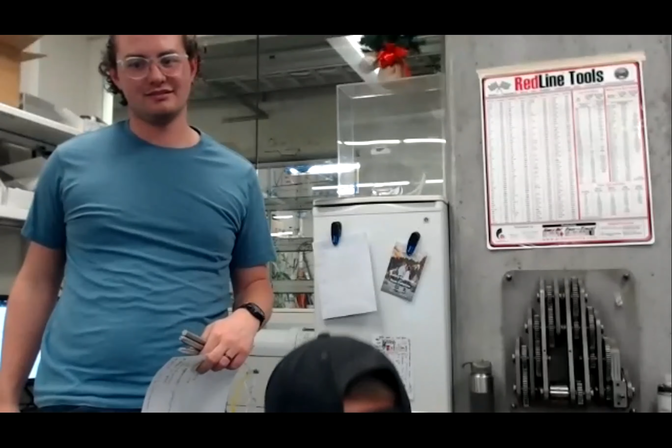Apparently I'm not using my audio. Look at that. Is our microphone working? Can you hear us? Can you hear me? Tyler! Sorry, I can hear you guys, but my headphones aren't working for some reason. I'll be right back. So his headphones haven't connected to his computer, but he could hear you coming out of the computer probably. It's a good solution. Okay, there we go. That was great.

Wow, Lizzie, your fan is amazing. I hope you're okay. Lizzie, we can't hear you. Oh, well. Okay, cool. I was muted. I didn't know. That's okay. You are good. Look, with the background recognition thing, it slowly chops away part of my face. Anyway, cool. Well, let's get going.

All right, let's get started, guys. How many of you did the practice assignment from last time? Good job, Ashley. Do you have any questions? Was there anything confusing or that you couldn't do? I have one question. So with boring, with circular and the other one, which one is faster? Because I noticed with circular, every time it does it, it comes back up. Does that time add up?

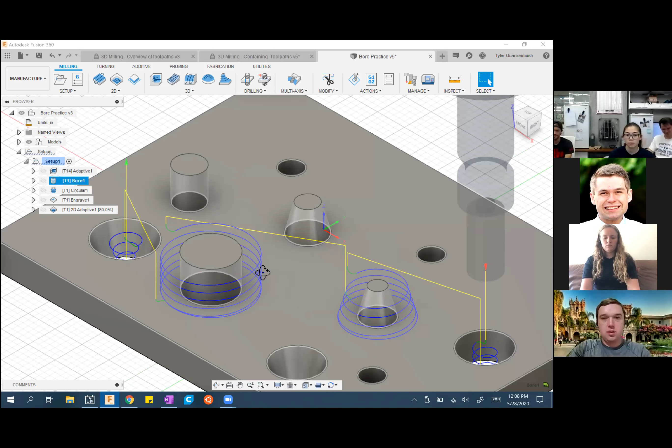Let me share with you. Okay, so you were noticing that bores and circulars, what you're noticing is something going on with the linking parameters. In a bore, the yellow line travels in and then it just goes down. Whereas in a circular, you can see it better on one of these tapered guys, it retracts every single time. That's something you can control in your linking parameters.

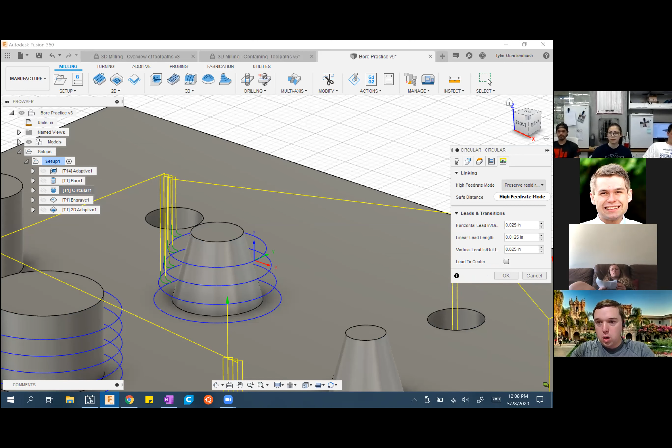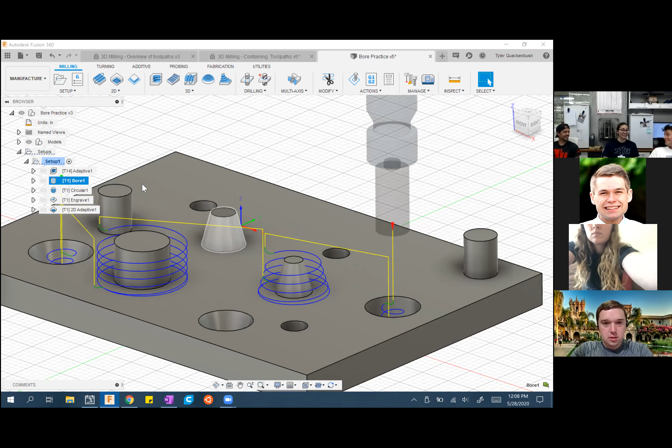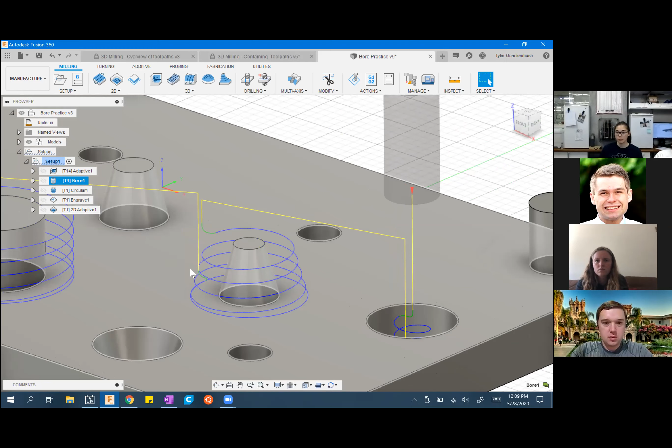Whoa, you can't control that in a circular. I'm wrong. I have no idea why you would want to do that. Actually, I have a thought. Does anyone else have thoughts on why you would want a toolpath that retracts and leads in and leads out and does all sorts of funky stuff like this versus a bore which just goes down and in? Thoughts, feelings, concerns?

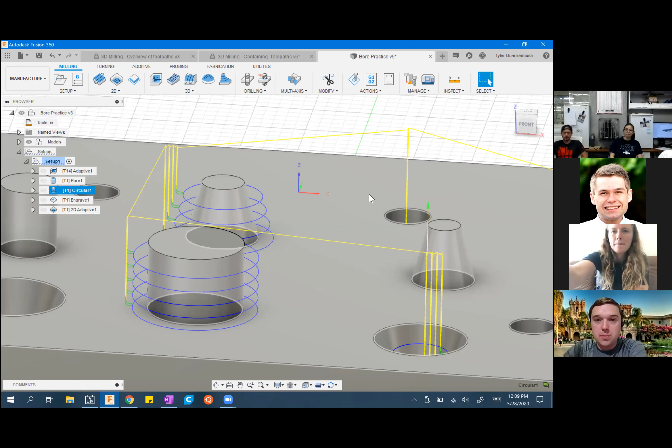I had one thought and now I'm realizing it's invalid. Imagine we hadn't cleared away any of the stock here, so it's still this chunk of stock, and we're just going to do this circular. We would be going in and out here, but those are rapid moves, so that would still crash the machine. Honestly, I have no idea when you'd ever want to use a circular. In answer to your question, Ashley, the bore is probably always going to be faster.

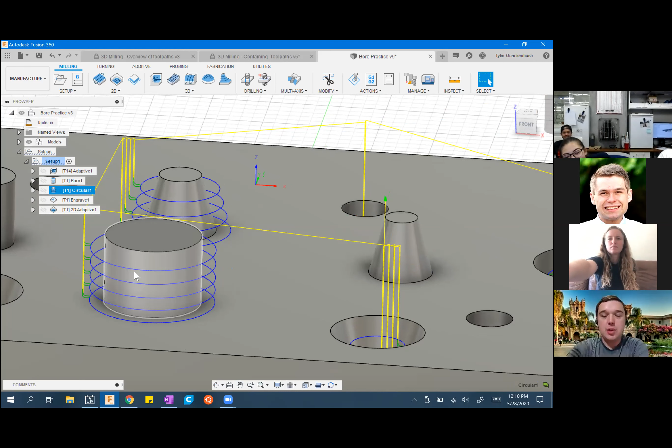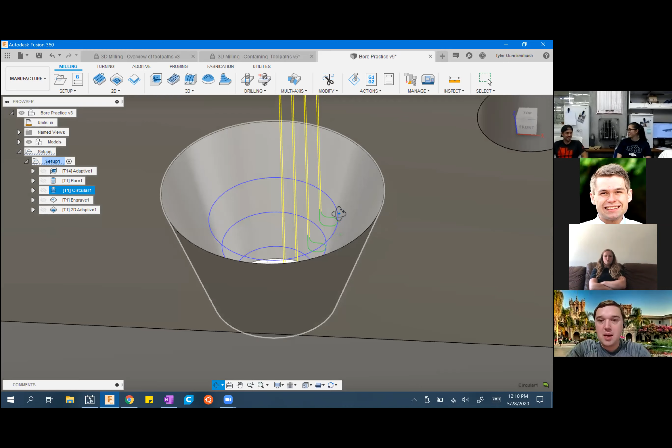Does it help with chip evacuation at all, or does boring take care of that? Oh wow, Ashley, good job. That is probably a situation where it would matter. Say you're going down into this hole. That would give the coolant time to evacuate chips, and give you time to come back in and get things done. In metal it probably wouldn't matter a ton, but in wood chip evacuation becomes a huge deal, especially on routers. Thanks, Ashley.

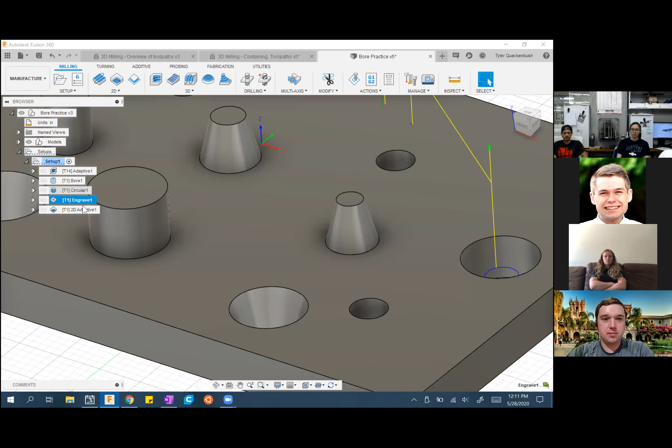Anyone else have thoughts about those two toolpaths or questions about the exercises? Okay, sweet. I'm going to point out again one of the big things you would have done in this 2D adaptive review, finding out why that toolpath looks so funky. I'm going to simulate this, and find where everything goes to pot, where we're violating an assumption. Actually, I'll just zoom through and find it, because asking you to tell me things through Zoom doesn't work.

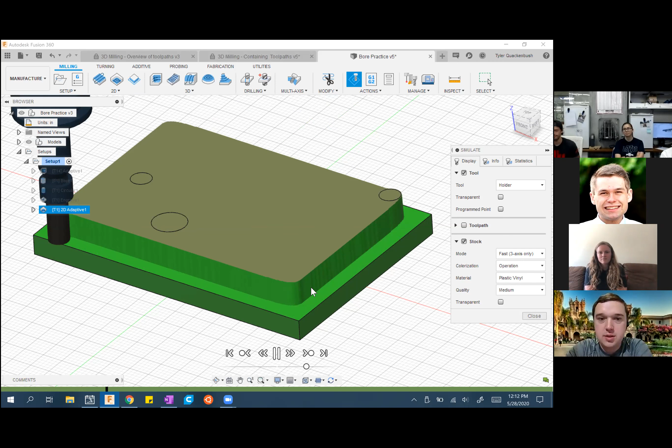Okay, so I think on this next pass it'll do it. So you see how it's taking off its constant step over? But once it reaches one of the holes that was left as kind of void from one of our... Are you guys seeing this run fairly smoothly? Is it super jerky? It's jerky. It's jerky, okay. Well, I will stop it and slow it down when it gets to the interesting part.

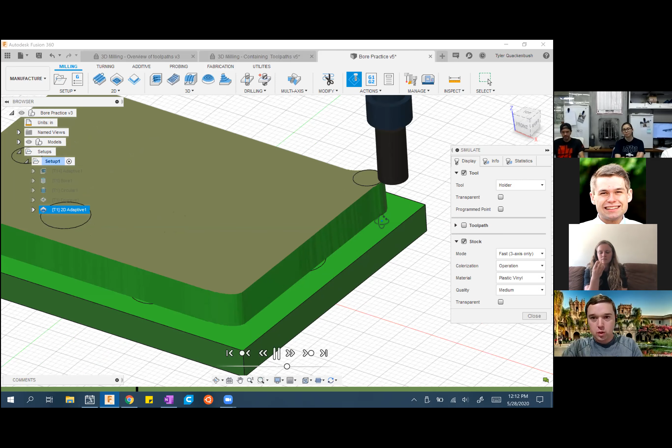Okay, here we go. Okay, we're gonna watch this in excruciating detail. No, don't go, okay, good. So, we're gonna watch from above. All right, so you're gonna see it come in and it's taking off its traditional chunk. But you see as soon as it gets into there, look how deep it's burying itself in the stock. It thinks it's moving through air, but in actuality right here, it's slotting.

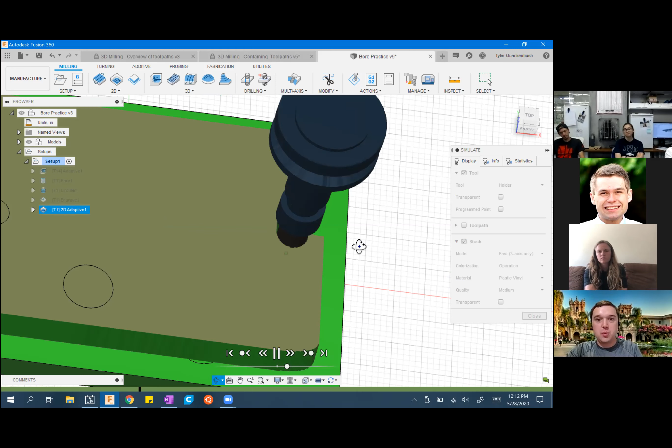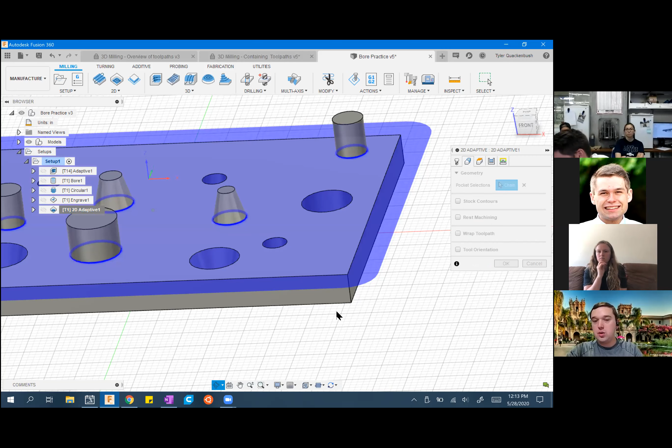That's full 100% engagement right there, which is totally going to wreck our tool, because our selection told it that it had no stock relative to it. Once again, if we come into here, we can see our selection, and I just selected this face. You'll notice the blue that it shows you doesn't actually tell you that you're gonna shoot yourself in the face on that. You probably wouldn't even notice until you got on the machine and broke a tool. So that is something to be very careful of with Fusion's selection system.

Okay, Ashley, any other questions about bores, helixes, and stuff? Okay, cool. Well, guys, I am happy to blabber at you guys, but to be honest, I don't know how much people are going to get out of this class from just my blabbering. Yeah. I really want to encourage you guys to go and actually do these practice assignments, which once again, you can stay clocked in for. There's not a ton going on in the lab right now, and for those of you who are at home, this is something definitely good that you can do.

Let me see if I can do something real quick. No, looks like I can't. Okay.

So what do you guys want to do about that? Let's just have a little chat real quick, because I am not getting much feedback here, and I don't really know how well this class is going. But you guys do. So let's get some feedback. What are you guys thinking about how this class is going? Are things useful? Is me blabbering enough for you guys to learn? Do we need to take a break for a week and give you guys time to actually do practice assignments? What do you guys think?

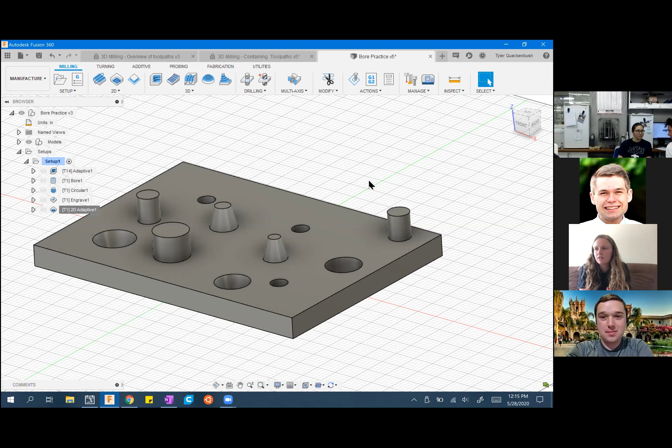Any other thoughts? Are we moving too fast, too slow? Should I be giving you smaller assignments in little chunks, smaller practices, so they're not so big and daunting? I have something. Yeah, go for it. So I think it'd be really cool to have a cool model, and then have a full class and just do all the camming for just one thing, and go all the way through. For me, that'd be really cool.

Okay, that's really cool. If that's useful, so today we were planning on covering 3D adaptive clearing. I could just work that into a model that I already have whipped up, and we could run through something like that today, if that would be helpful for you guys.

Cool. Thanks, Cam, not Cal. If any of you have read any Brandon Sanderson books, I'm rereading the Stormlight Archive, and one of the main characters' names is Cal, so sorry, Cam. I've read it too. Yeah, Lizzie, go ahead.

For me, I don't have a lot of computer access because Brad and I are sharing a computer, so I'm kind of slow. Also, learning Fusion, I'm just trying to get my head wrapped around it because it's just different than SolidWorks. I don't even feel like I have a good Fusion background, let alone a good camming background, if that makes sense. So I feel just behind. Okay. So addressing that one, Lizzie, would it be helpful if we took kind of a hiccup week where anyone who feels like they're behind could come and we could start over with basic stuff or run through.

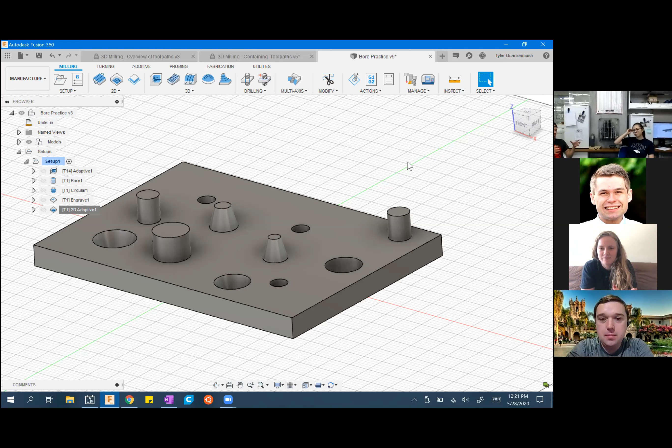On another note, let me pull up our calendar real quick. Go, kids, go away, I don't know how to make this thing leave.

Hide. Dang it, I can't get my tabs. Okay, well, we'll just mute it, and I'll just slam it back.

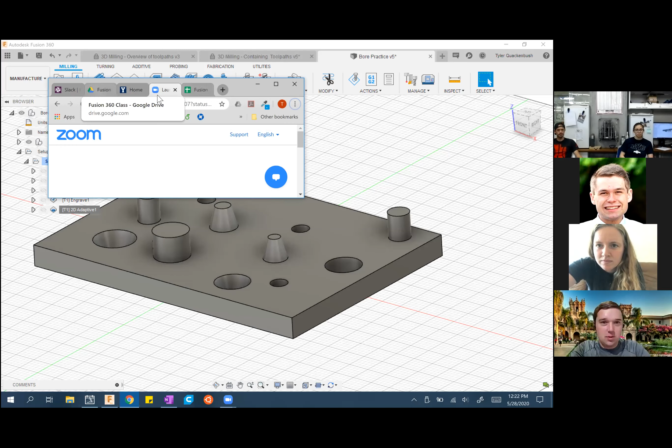Okay, so currently the last 3 that we've got, today we're going to talk about 3D adaptives and rest machining. I also realized I never put drilling in here. So, drilling.

We only have this week and 2 more weeks on schedule, so we have other potential topics here. I'm going to open up a poll to you guys, and I guess you prototyping lab people, I'll weight your responses a little bit more. Here are the potential topics we had. If you guys could pick your top 3 choices from that list, then we can talk about it once we have polling results, and how the class goes from here, because we're kind of reaching the end of my knowledge. Even once we start getting into 3D adaptives and surfacing, I'm not a pro. So we can have a little chat about how we want stuff to continue.

Okay, Benjamin seems MIA, so I'll take your two. So far I've got more feeds and speeds stuff, parametric modeling, toolpath patterns, 3D printing in Fusion, and tapping from you guys so far.

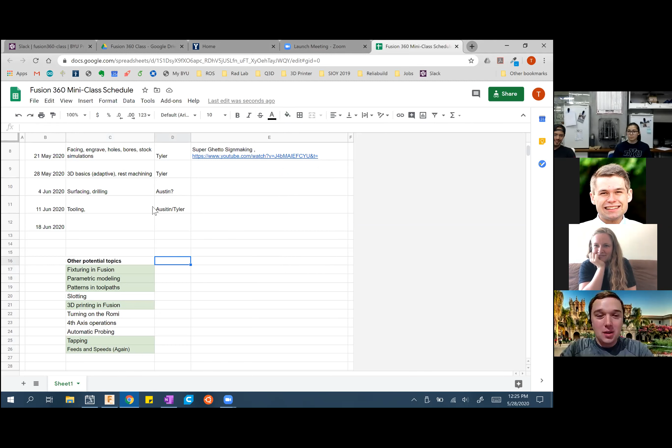Machine maintenance, machine maintenance, I just got a suggestion. But no, seriously, yeah, that one's a little hard to do over a Zoom meeting, but I might be able to stop into the prototyping lab and chat with you guys sometime. It's just the day-to-day things like oiling the rods and cleaning the CNC routers. Oh, totally, good point, Jennifer, thanks.

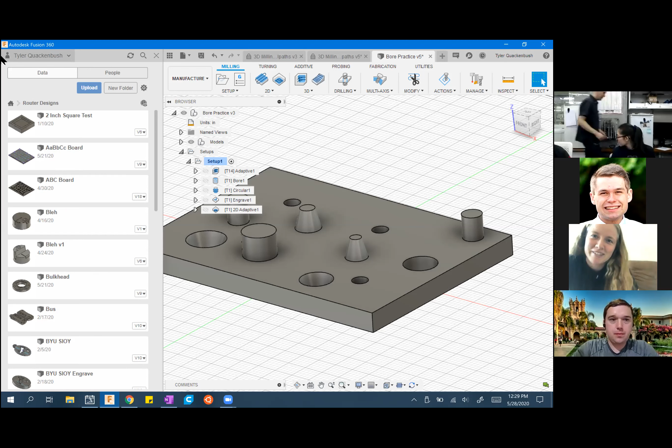Yeah, or just along those lines, where do we feel like our holes are in our learning? Just like refreshers, so we feel like it's okay to have holes of things you don't know, so there's a safe space to express that, because I'm a millennial. Okay, that sounds good to me.

Okay guys, without further ado, let's get on with this. Let's cam something. Okay, so I am opening up, this is my CNC router.

This dang top bar will not go away, and it bugs me. I'm gonna stop sharing for a minute and try resharing to see if it goes away. Dang it. Oh yay, now it went away.

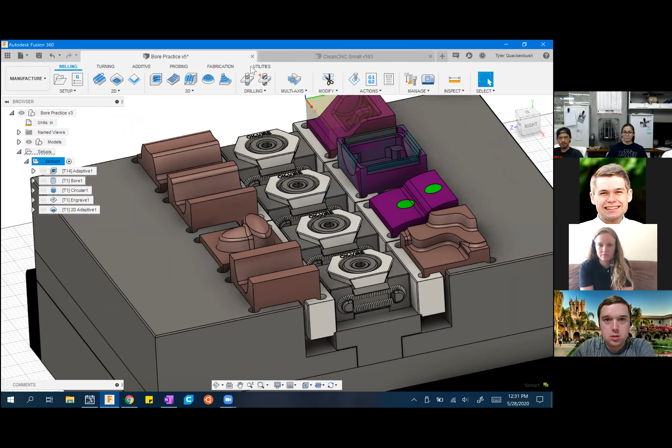Right now I'm opening up, oh geez, my computer's totally gonna crash, isn't it? So this is actually where I modeled my entire CNC router. I'm gonna kill these other ones. Yep, there's my entire CNC router, a translucent block. All right.

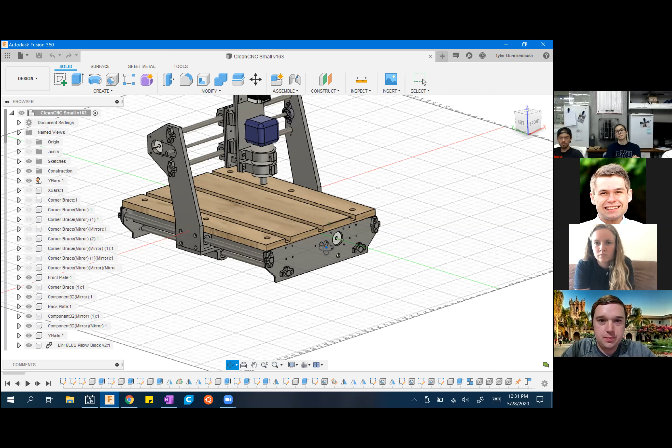So I'm gonna come in here, we're gonna cam something on this, start to finish. Let's see, what do we want to cam? One problem with this is it doesn't really show off 3D stuff, because I designed everything to not be 3D, since 3D is atrocious whenever you're trying to make anything. All right, let's cam this thing. I can't remember what it's called, we're gonna find it.

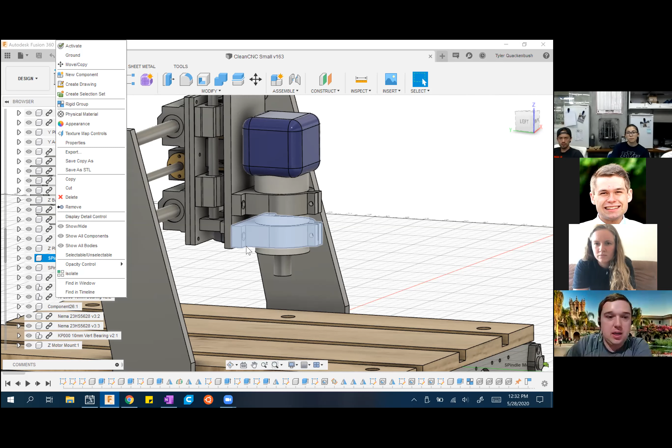Okay, this is gonna have multiple operations in it. So this is the spindle mount. In a multi-part assembly in Fusion, one nice thing is you can isolate that part and cam it in context. You'll notice when I go into my manufacturing workspace, there will be cam files for most everything in here. The way you do that is right-click and hit isolate, so that shows just this component. If I want to get out of it, I can recheck everything, or right-click and hit unisolate, and everything pops back into existence.

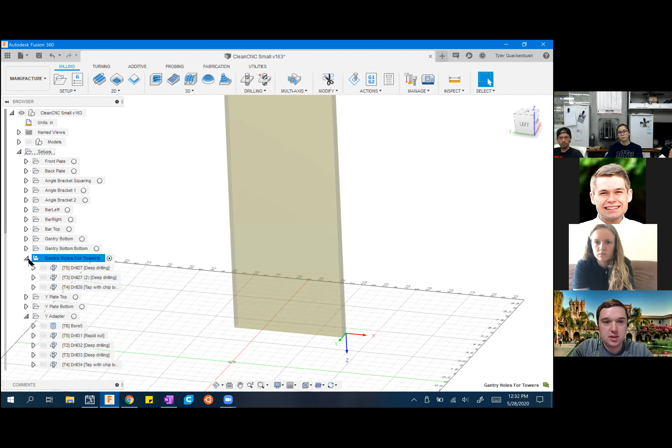I'm going to isolate it and then head over to my manufacturer workspace. You'll see in here, this is where everything and its dog lives - so many living dogs - but this is where I've cammed so many different parts.

So what we're gonna do is make a new setup. This is where stock considerations have to come in - I have to figure out how I'm gonna clamp the thing and where I'm gonna machine it from. So imagine I've got a piece of bar stock that looks like this, and I'm clamping it over here. That's how I'm going to imagine machining this thing, with it hanging over the edge. That's a bad idea, there's probably a better way to machine this, but we're going to do that for now. I'm going to hide you guys so I can't see your faces.

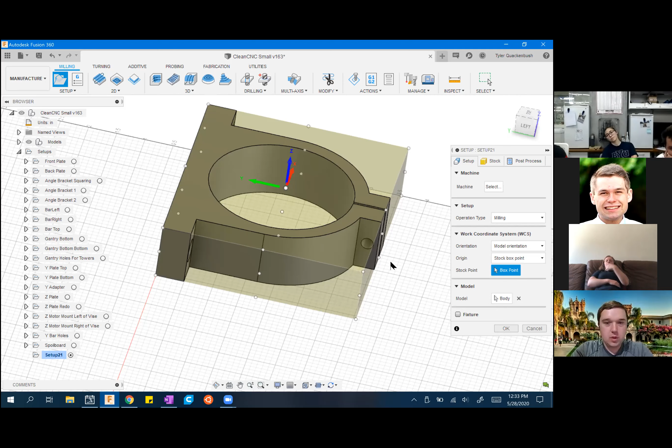Okay, so my general thought is, I need to adjust my stock. So I've got a little bit of a conundrum - I want to add some stock on the left so I know where I'm grabbing and can simulate that. But if I change my stock side offset, everything gets bigger, which is frustrating. Oh, what I should have done - all right, here we go.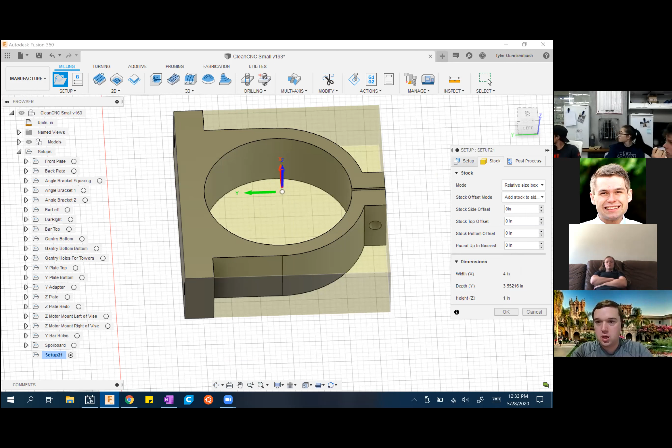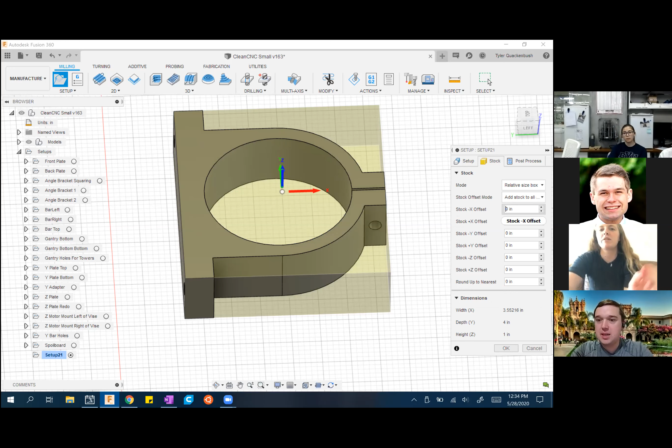I'm going to select my Z-axis and then my X-axis, and now I've got my stock oriented the right way. That's always important to do before you adjust your stock size. So that frustrating thing happened, but I can add stock to all sides, and then in my negative X, add in like 3 inches of stock. Then I've got the size of the bar I'd probably actually end up working with. I can see my depth is 4 inches, which is probably the 4 inch by 1 inch plate stock that I ended up finding.

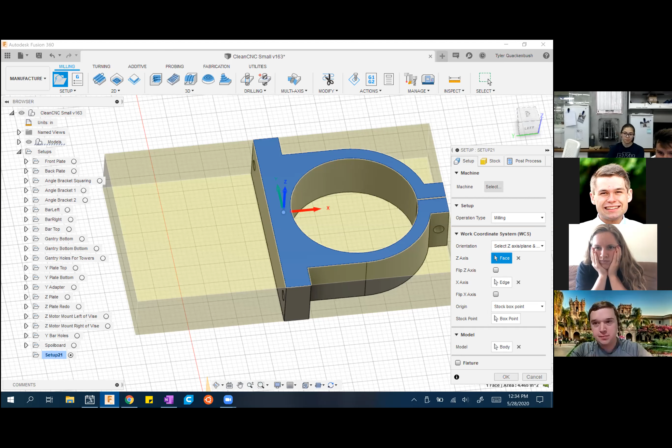So that looks good to me. We're gonna click on that and move on. Okay, what I do from here is I would probably use entirely 2D adaptive clearing toolpaths.

So I'd come in, since there's a lot of room to stick out I'd probably end up doing this on the VF4. So I'm gonna come into my VF4 standard library, and I'm gonna show you guys roughing this out with the 1/2 inch bullnose. There we go. So you'll notice in the tool library in Fusion, it lists aluminum and steel next to things.

That basically just means 3 flute versus 4 flute. So we're doing this out of aluminum, I'm gonna come in with my bullnose. Then I'm gonna look over my feeds and speeds, knowing what I want to do. Normally I would punch in feeds and speeds and then select everything, but in this case I'm just gonna select everything and then punch in feeds and speeds so you guys can see exactly what I'm doing.

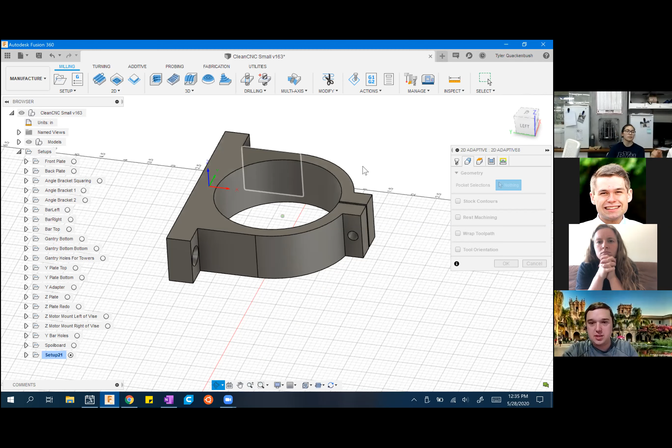So pocket selections, I want to rough out this outside as well as this inside, which I can do in the same operation. I probably want to do the outside first, so that the bulk of this remains strong. Imagine if I were to cut out the middle first and then start milling the outsides, it can jiggle a lot more than if I mill the outside first and then the inside, if that makes sense.

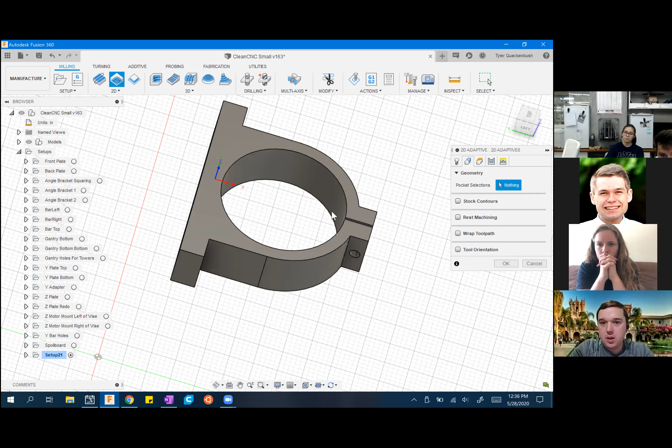Okay, my stock contours on here are not the ones I want, so that's the total stock, just so I could simulate it. I'm gonna come in and change my stock contours. Oh no. Okay, what I would want to do is select some stock contours that are just a rectangle around this, but I can't do that.

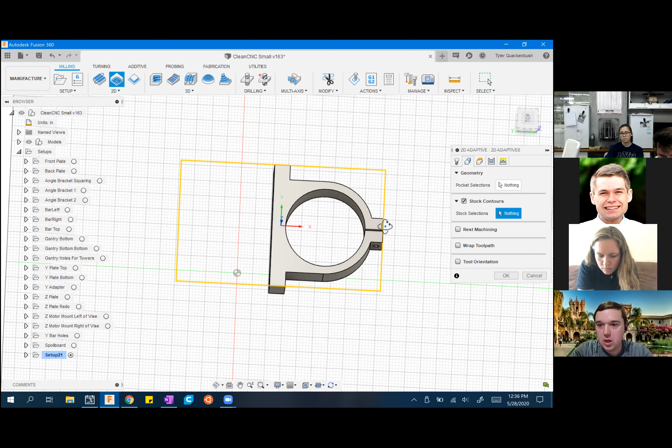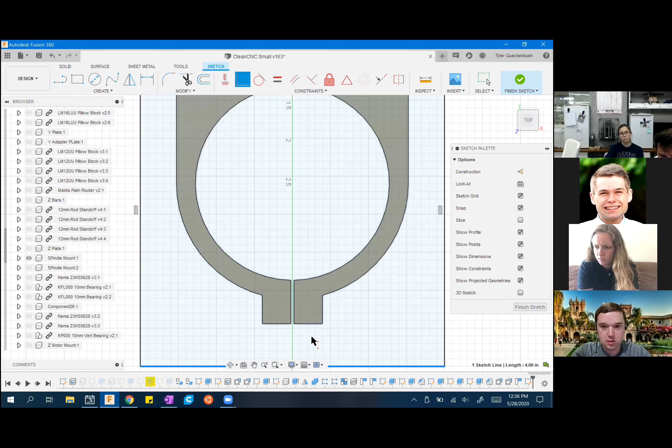So what I'm gonna do is go back into my design workspace. I'm gonna make a new sketch, and model in, just in a sketch, what I want my stock contours to be. So I'm gonna constrain that point and that point to be coincident. I constrain that line and... get at me, hey. Oh okay, I'm gonna constrain 2 lines to be collinear.

So this line and this line are now collinear. You see my sketch is all black, that means everything's fully constrained. And then I pop back into my manufacture workspace.

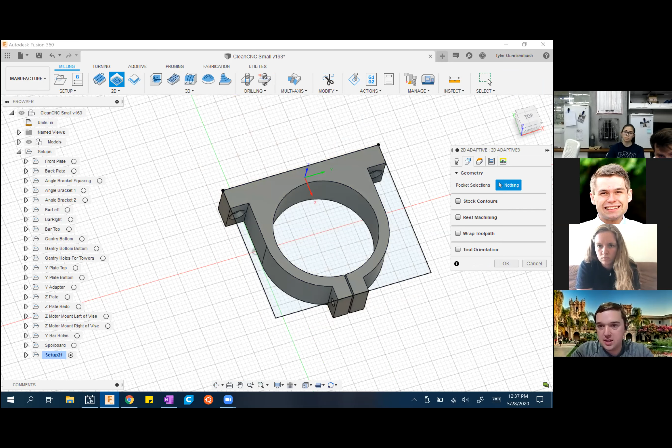I still have this random setup 21 activated, so I can come into my 2D adaptive clearing and select my stock contours as this. Now that 2D projection tells, this is the stock I want you to care about as I'm simulating, as I'm calculating stuff. So then my geometry, I want to select this bottom edge, but not all the way around.

So I'm gonna select there. I don't want it all the way around, so I'm gonna click it again and say open contour. Then I can come in and select this edge. That's not where I want it to be though, so I'm gonna come in and select, oh, poopeth.

I didn't think about that. So because I have this little gap in here, this entire bottom edge is gonna get selected when I do my open contour. Let's look and see what happens as that goes on. It may or may not end up working out.

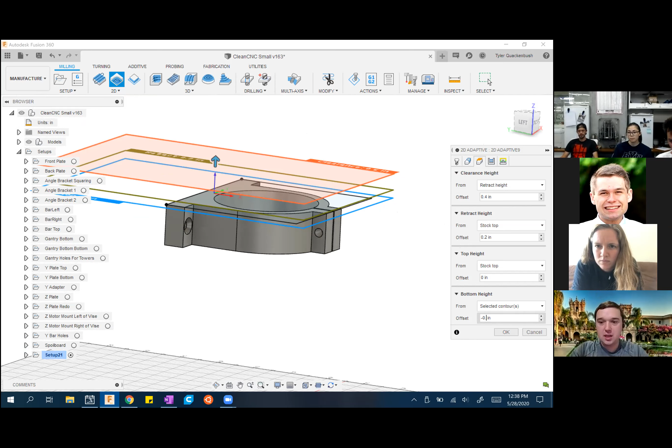Okay, so I'm gonna select my heights. I'm gonna trust my clearance and stuff planes because I've already got them set up where I want them to be. I know I'm not gonna have any bolt down sets or anything, so I'm comfortable with a clearance height that's 0.6 inches above my part. My bottom height, selected contours would make the bullnose touch right there, but I don't wanna do that. I want my bullnose to go all the way down, so I'm gonna make sure my offset is more than the radius on that bullnose cutter. And when we simulate, you'll see what happens.

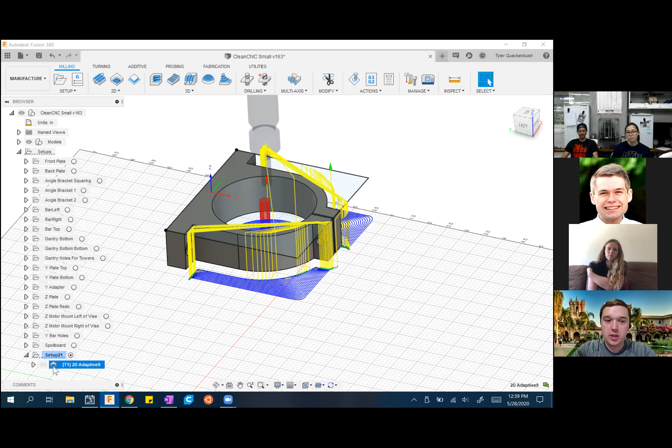Okay sweet, that's not exactly what I wanted to do. So often I come in and right click and hit edit. That's not the only way you can edit. If I try double clicking on this, it lets me edit the name, which is dumb. But if you double click the icon, it brings up the edit window. So quick tip for those.

And it's using a 1/4 inch flat, which is dumb. That's why it was doing weird things. VF4, 1/2 inch bullnose. Okay, let's try that again.

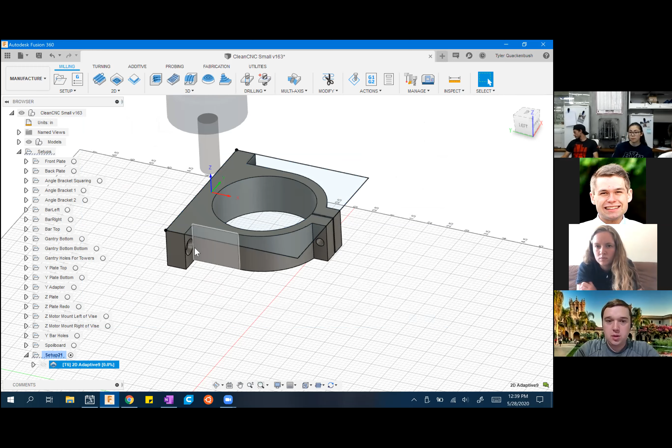Okay, so now you see what I'm trying to do. I'm gonna try to mill all the way around there, and go full depth on that. So I want to adjust my step over and stuff accordingly. It's been a while since I've done this, so my feeds and speeds might be a little bit off. Since I'm on the VF4, my maximum spindle speed is 8 grand, so I'll leave that on there.

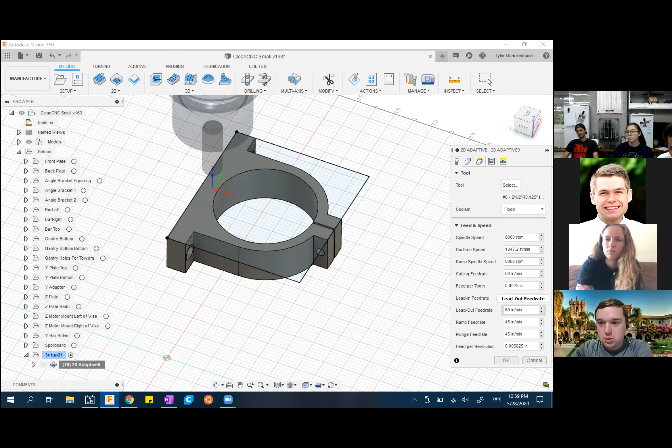Okay, feed per tooth, I'm gonna be a little bit more gentle with. Oh, that's good. I'll leave 2.5 thou per tooth. Okay, those are probably good. Now what I wanna do is, since I've edited my heights, I come into this guy and I edit my optimal load. I'm actually gonna change this down to 10%. Step over. It's in climb direction, which is great. My minimum cutting radius is 10%, which will probably be fine.

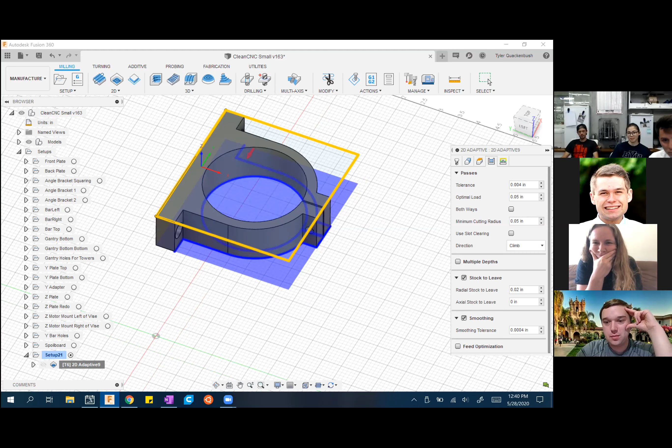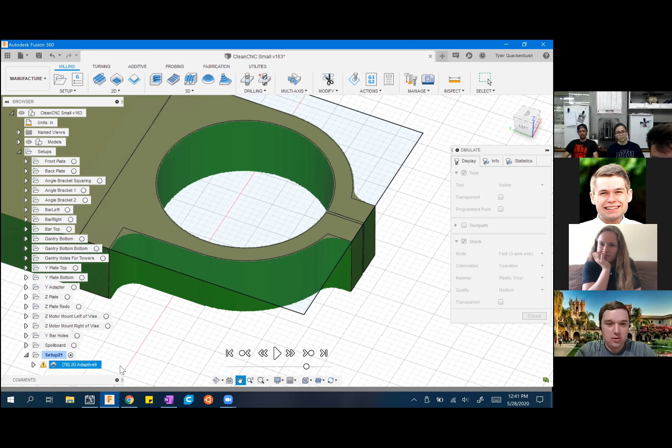Yeah, so just so you guys know, this piece that I picked right here is actually really atrocious and is not well designed for machining. Does anyone watching have ideas of why this is going to be terrible to machine? Let me simulate it and give you a little hint. You're gonna have a radius. Oh yeah, I will. Look at that. That's gross. And that's gross. I wanted that to be square, but it's not square.

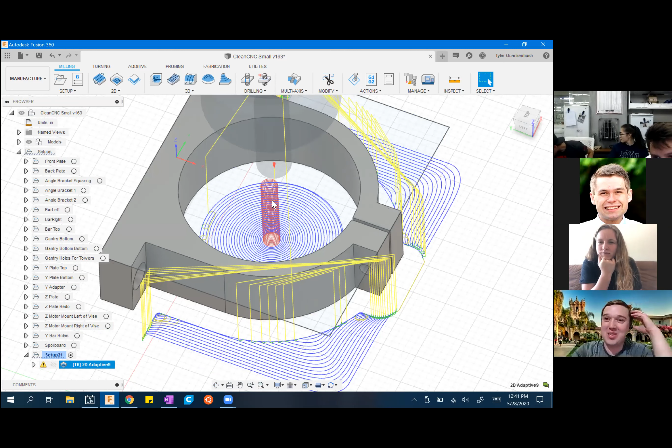This part is poorly designed and would need a lot of different setups to make it work. I'll show you how I would do it. Or how you did do it? No, I haven't machined this one yet. This one I ended up just 3D printing because I just wanted to be done with my dang router. So it's probably the least rigid part on my whole router, but that's okay. I can put up with it. Yeah, so that's a problem. And no amount of tiny tool is going to make a difference on that because it's so deep down.

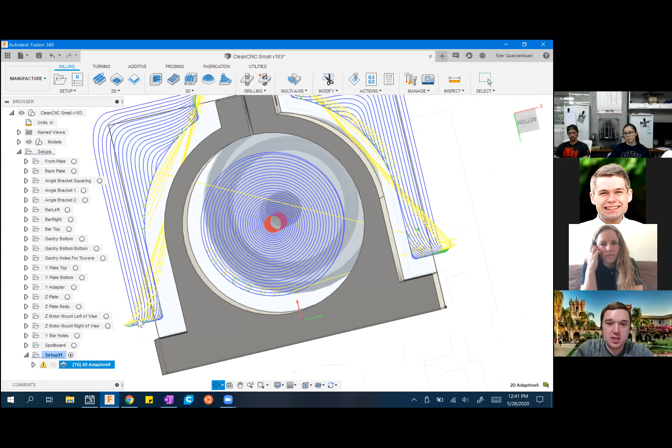What I would have to do is I'd have to flip it up into this operation and come in with some atrociously long tool to get that square edge, then hit that square edge, do it in a different operation to get that atrocious angle and put those holes in. And then afterwards, I'd probably come in on the bandsaw and just chop that with a bandsaw because I don't want to deal with it. That's what I was thinking. Yep, I need a 5-axis mill.

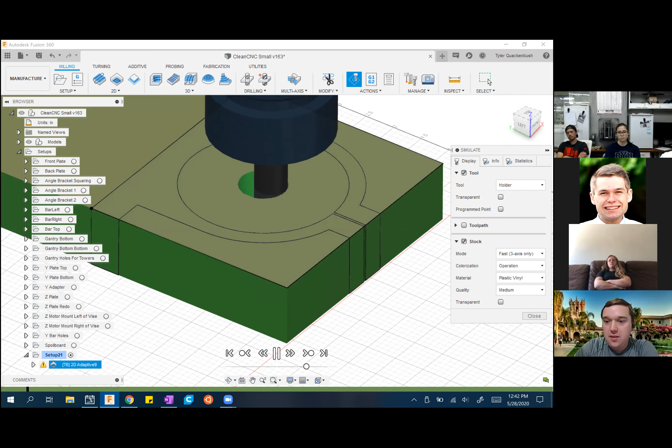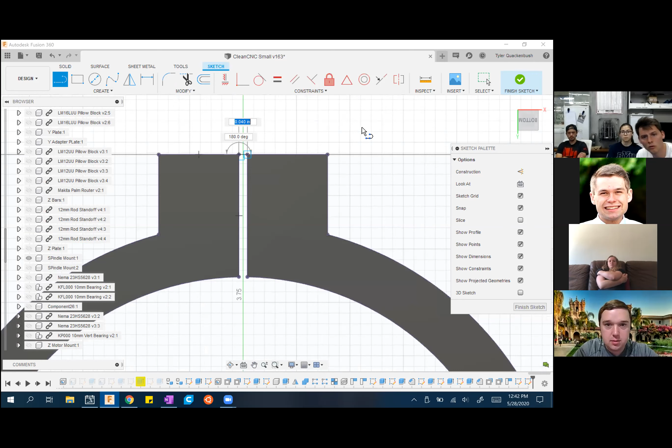So, remember how we had a little drama with my stock selection setup? You see what it's doing first is it's cutting out that middle portion, which we talked about we didn't want to do because of rigidity concerns. What I have to do now is if I want to force it to do the outside first and then the inside, I have to come back into my design workspace, make another sketch, come onto this bottom, project all this geometry, and then I'm just going to bridge this gap with a line. What that does is it gives me one continuous curve.

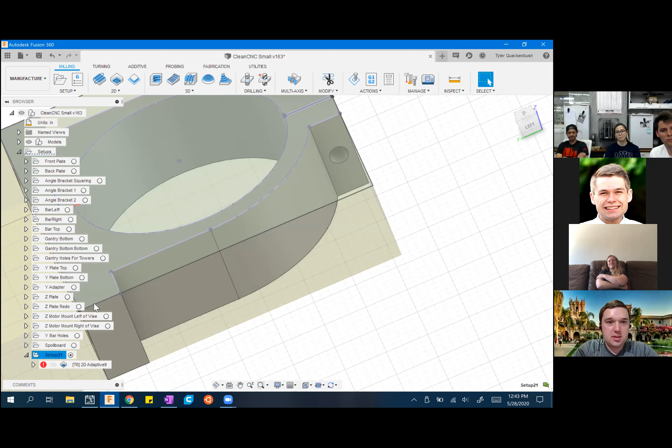Oh, what? It was on the top. Well, that's silly. Sorry, guys. Well, in a future day, I would go and change that sketch plane to be on the bottom. But instead, I'm just going to show you how I do this. Okay, so now, hide. Instead of selecting that bottom chain, I'm going to come in, I'm going to select this guy. So this is a common technique used. Oh, no, don't select the face. Oh, where is it? There.

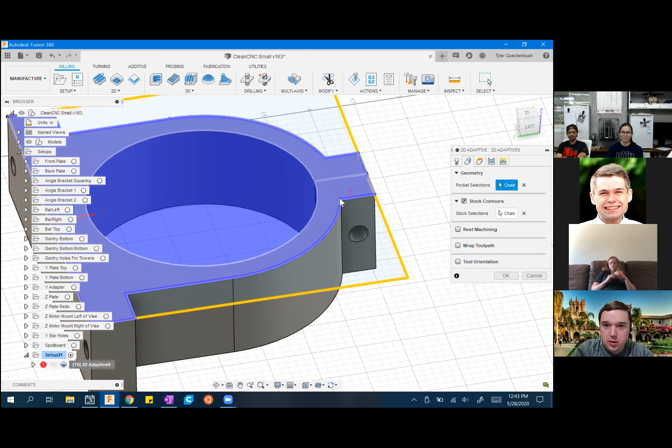So I've selected that edge, but you see the little arrow is showing the inside. I click the arrow and then it goes to the outside. But because I bridged that little gap, now it's just doing this line. What this also means is, though, since my bottom height was based on my selected contours, I'm not going to actually mill much. I'm just going to dip my toes in the stock and then move on with my life. I need to change that.

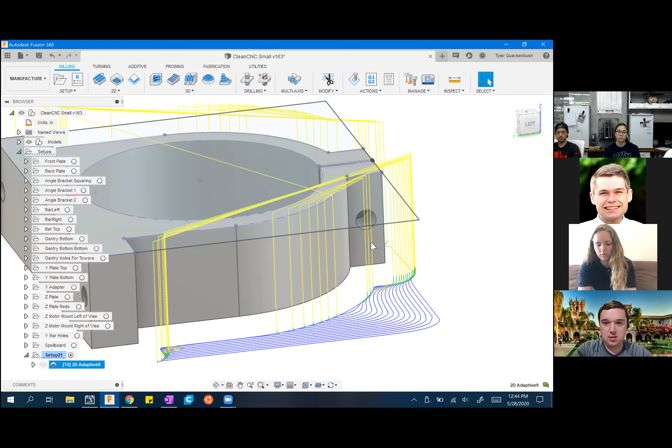So I come in, and my heights, instead of a selected contour, I'm going to go for a selection. That selection, I just select anything that's on that bottom plane. You see my bottom updates. I still have my breakthrough, and my toolpath will generate just dandy. Great. Okay, so I'm going to come in and edit that.

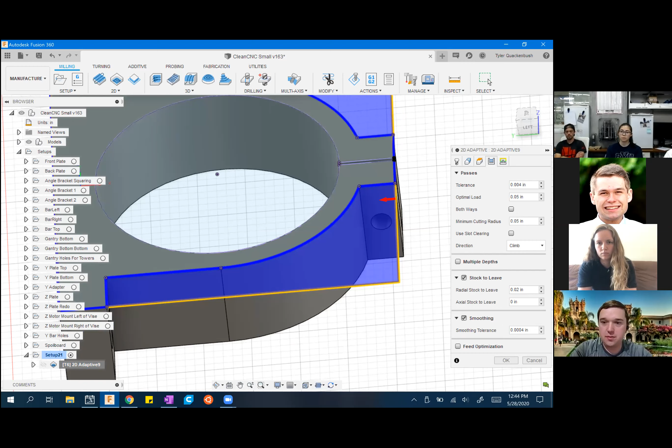You notice I've got stock left in here. I've got radial stock left on the edges. So I'm going to want to come in and clean that up with my good friend 2D contour. So I'm going to come in with the 2D contour, and fortunately we made that geometry, which is good. So I can still come in and select that geometry.

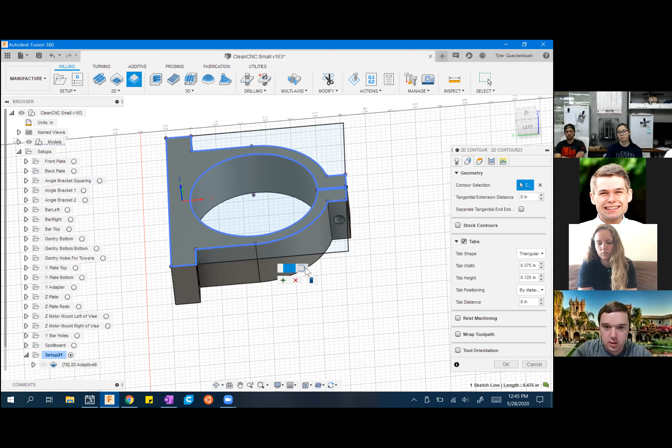And I'm going to go on open contour, and then this allows me to come in. I'm going to select to that point. Then I'm going to select this guy. So because I selected my, oh, you stinker. It selected that entire outer thing. Okay, well then I'm going to cancel that.

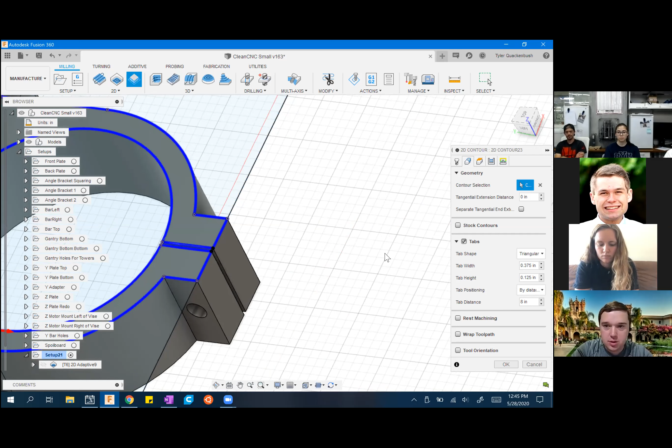And I'm going to come into my model. So in this models folder is where everything you've modeled exists. In my sketches tab, oh my gosh, that's an atrocious amount of sketches. I'm going to hide that big box so it doesn't mess me up again. Little stinker. Collapse that. And now I'm going to select this. Because I've hidden that, it'll let me select what I want to do. I don't want tabs.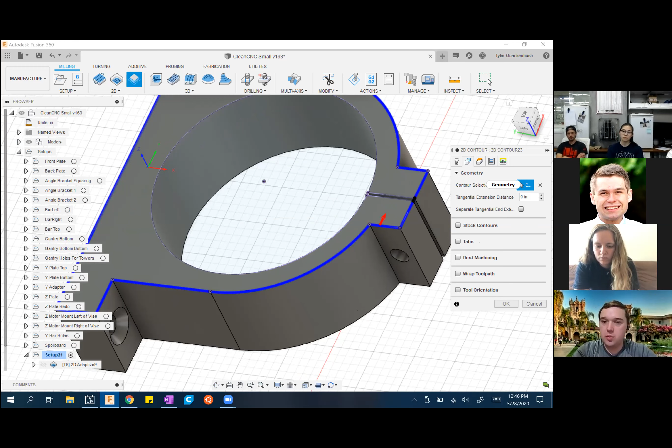Sure, I'll still use that same toolpath, but I'm going to feed a lot faster, because I'm not going to be cutting as much. I'm only taking off 20 thou. I come into this. Once again, my selection is on that top face. So I need to adjust my bottom height. My selected contour is that top face. I need to adjust to a selection, make it that bottom one, and adjust my

bottom. You notice on these planes, it lists relative to your work coordinate system, so top dead center of this thing, where this plane resides in space, which is really nice. Okay, I'm doing climb milling. I don't have to care about any of that, except smoothing is always useful. My linking parameters I've already got established at a point that I want.

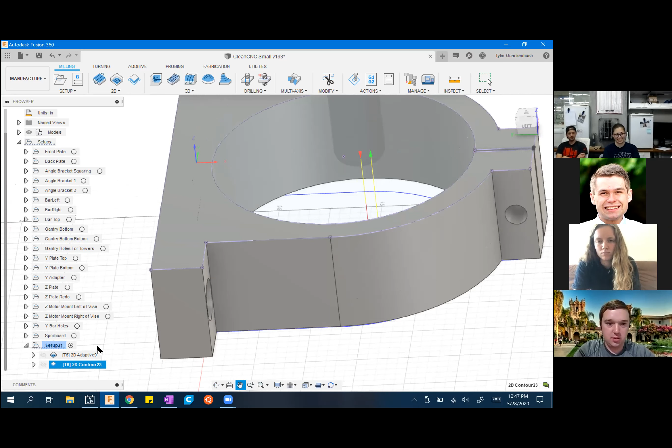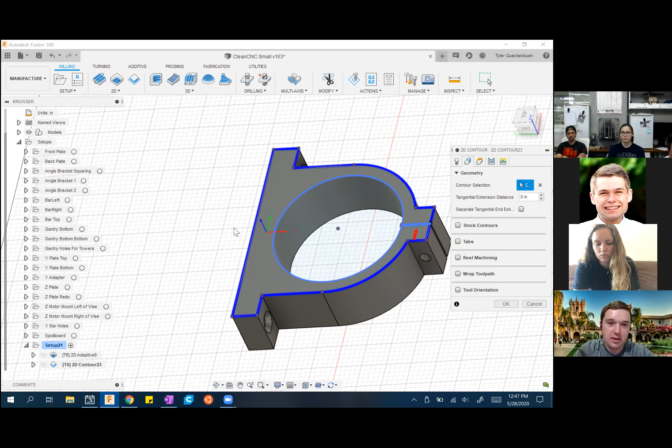Oh, and I made a boo-boo. You're gonna see as soon as my computer stops wonking. My 2D contour is on the inside of that, and it definitely is going along that back edge. So I did a dumb. Okay, this will be the last thing, and then I'll show you how to post. So because I did the wrong thing on that, I have to click that arrow to make it be on the outside. And I have to reselect this and hit open contour, and then come in and select, oh, that's

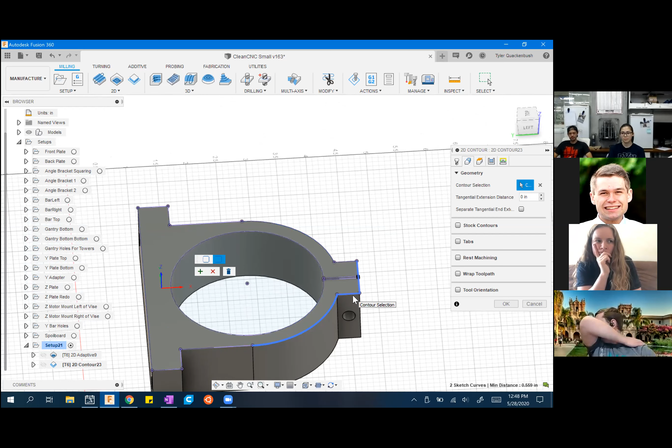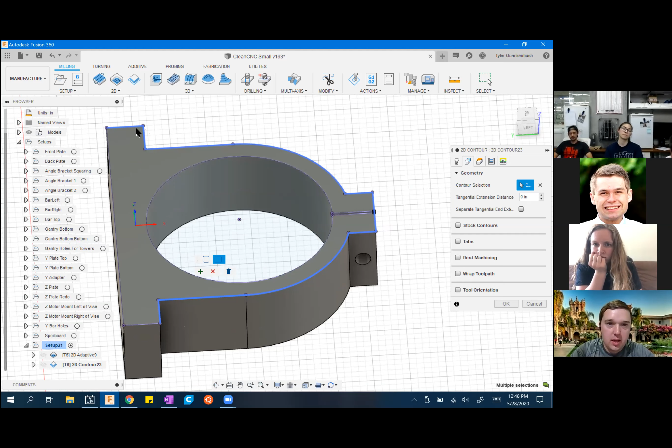the first one. So I'm gonna come into here, and if you remember, Fusion just keeps kind of guessing what you want as you select things. Oh man. Excuse me. Well, okay. Fusion sometimes hates everyone, and that's okay. I'm gonna select this line, click on it again, hit open contour, and then I can come in and select that one, and then I'll come in and select this guy, and then I'll hit that one too. Oh, dang it. I selected that one, but pretend I didn't. No, I'll select that one too.

So what I did there is Fusion sometimes wants you to put in a start point and end point. So I picked far away the exact end I wanted and specified middle points, as opposed to trying to specify a bunch of middle points. You should always specify end points first if you can. Okay, changing my heights, got that. Everything should be good. All right.

No, you sneaky weasel. Well, let's pretend Tyler actually clicked the right button, because I didn't click the right button. I need to click this plus for it to accept the current contour. Okay, there you go. Now Tyler actually did a thing and it actually worked.

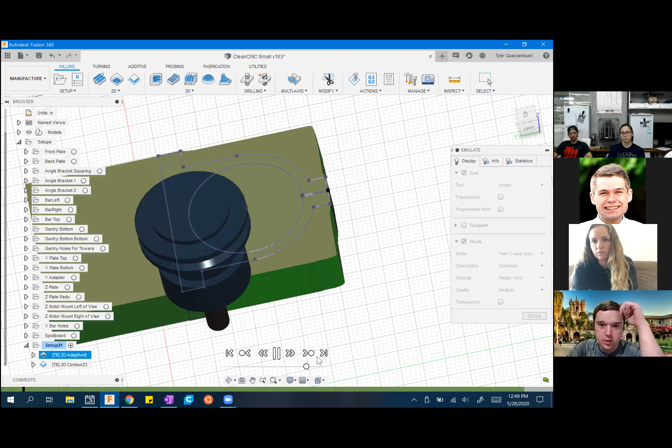So when I come in and simulate this, it's only going to do the outside of this guy, which is okay. I'll just speed it up and it'll just magically appear. But that guy goes through, handles it all, and there we go. We're not going to worry about the inside because we're running out of time. So let's say I've looked this over. I'm confident everything's going to work.

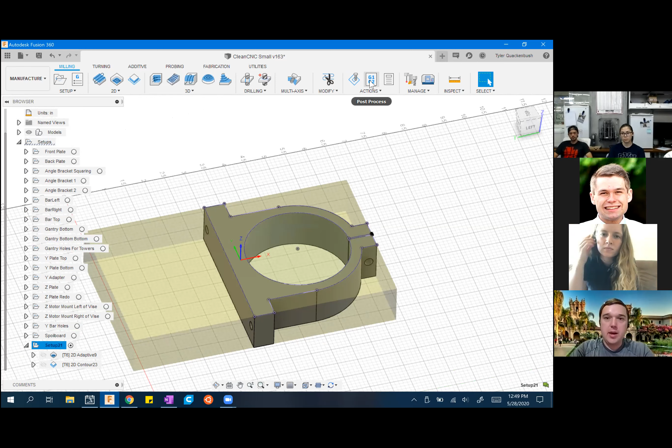Now I come into post-process, and that's this little G-code box over here. In here is where you get your posts. So for most of the things you guys are going to be doing, you're going to be posting to the VF4 or DM1. The way you do that is you have to access your cloud posts. So you come into here and you hit use cloud posts. Then it'll show you what you're doing here. So I just have one post, and this will be a post shared with you guys. It's called Haas Post Alex.

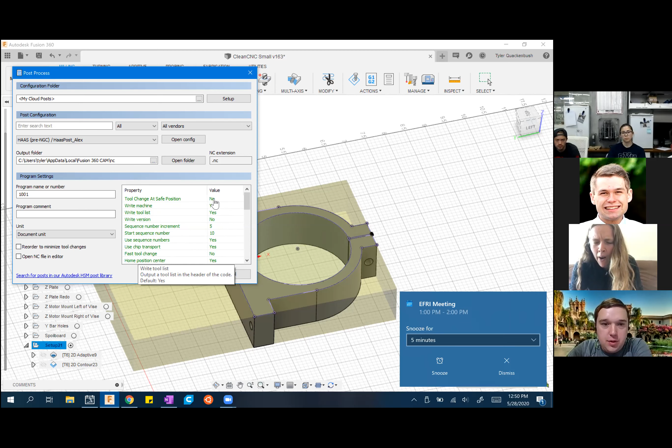So this is one that Alex Laraway has edited to be a little more friendly to our machine specifically. In here, you can see values that you can change on the fly. So things like tool change at safe position. If you're working with a really tall piece, sometimes the VF4 will do tool changes and smash your tool into your part and break things. I've actually had that happen to me. You can enable tool change at safe position, and it will move your tool away from your part and then change tools and then bring your tool back to your part.

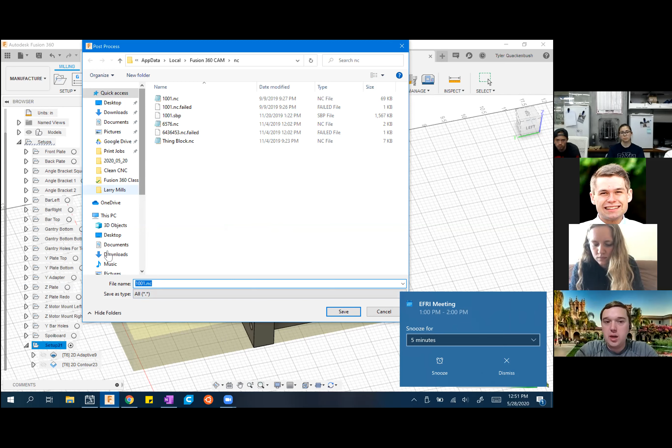These are all little things that you can edit in case you need to. Normally you won't touch them though, and that's okay. So you hit post. This will let you save a file somewhere, anywhere. And in this box is where you want to name it whenever you're saving it to a file.

You'll notice in here, when I come to post process, it'll ask you for a program name or number. Never change that. Haas machines expect a 4-digit number in that box, but they don't really care what that number is. It has something to do with where it stores it on the machine, but we don't really care. If every single program you ever write has the number 1001, you won't notice a difference. Once again, you save the name in here. If you try to change that 1001 in that other box, the Haas machines will not cooperate.

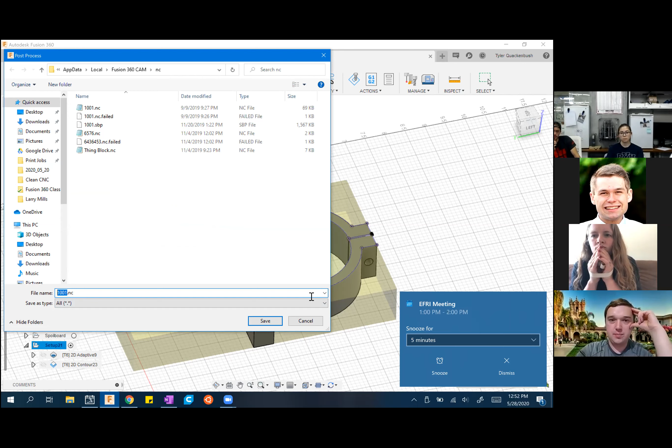Okay, that is how I'd go start to finish on a single part. This wasn't quite the best part for showing that, and I didn't get to show you my 3D adaptives, but we are out of time.

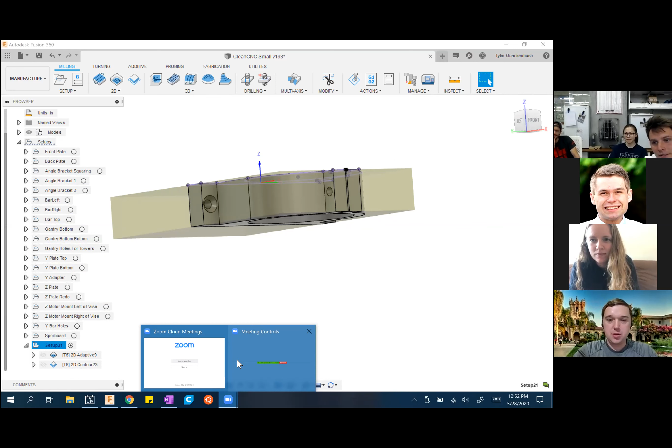That was awesome. Thank you. Okay, Cam, that was useful. That was so helpful. Okay, cool. I learned so much. Okay.

Maybe I'll try to do that from now on when I'm teaching you guys a new toolpath. Maybe I'll just run start to finish with that toolpath through with you and just try to make sure that part forces me into showing you all the things I'd want to show you about that toolpath anyway.

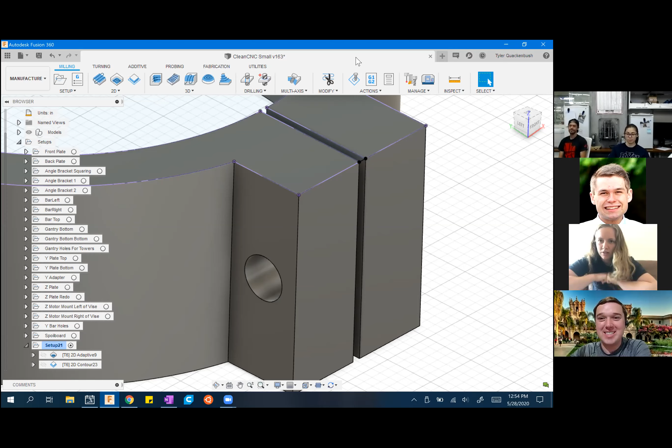Are you home, Tyler? I am not at home. I am. Where are you? He was in the peanut gallery. Peanut gallery. Well, my background is Balboa Park. Did you recognize that? Yeah, maybe it's that little person back there that's talking. Oh, this is where I am. Oh. This is Tectum Tech. I know where that is. Yeah. Yep. Lizzie, you've been here. Yeah, that's cool. I knew it. Tell Heather that she's amazing. I knew it too.

And thanks, Lizzie. And I hope little Logan is doing well. Thanks. He's doing his best to keep us from sleeping, but that's okay. Kind of his job right now. Yep. Unfortunately. How's Scott? Scott's doing good. He is getting to the stage where he's starting to get scared of the dark. So we've got him fixed up with a nightlight, and then he has this little silicone whale that he can smack to make it light up. But it only has like 4 or 5 hours of battery life on it. And we thought that'll be enough because he'll probably turn it off and go to sleep. But he wants it on all night basically. So it dies in the morning, and then he wakes up screaming because his whale isn't lighting.

So when's his birthday? It is in 3 days. Oh my goodness, he's turning 2. Oh my gosh. 2 years old. Wait, what day is the 31st? It's Sunday. Okay. Well, happy birthday, Scott. Well, this is being recorded, so you probably don't want... No, I actually stopped recording it. Maybe Benjamin didn't stop recording it, but I did. Okay. Well, tell Heather she's awesome. I hope she's doing okay. You too. Tell Brad that we say hi too.